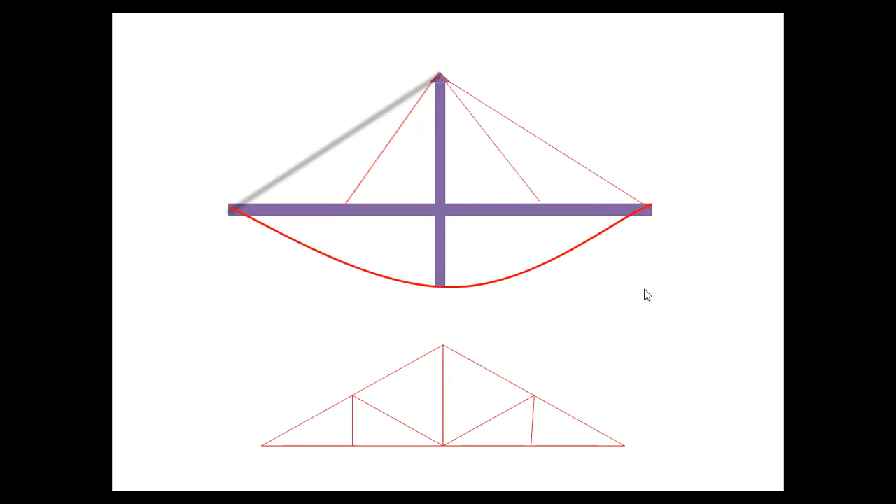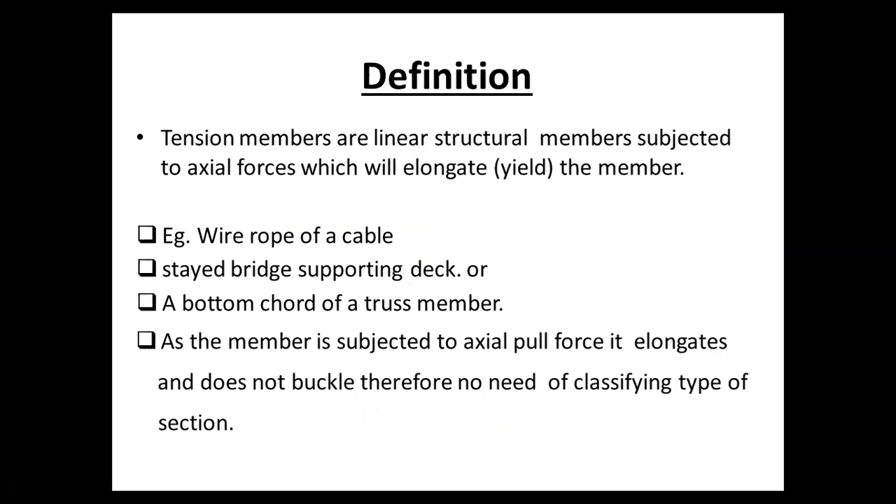So, types of cross sections for tension members. A tension member may consist of a single rolled section or a combination of sections as a built-up section, right? So, what is this built-up section? We can understand further by this. I am explaining you the figure, right? So, usually single angle and double angle sections with gusset plates are commonly used for truss members.

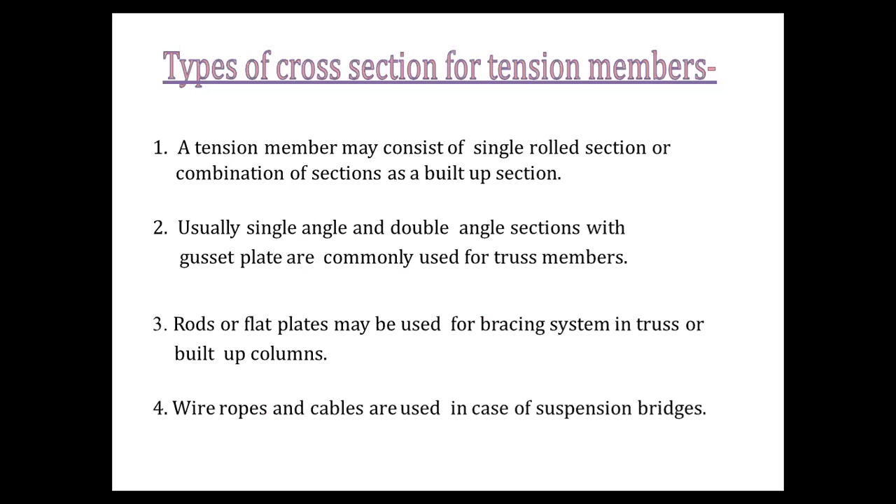Second is a W section. Next one is a square tubing. Our fourth one is a channel section. Fifth one, E, is a single angle. Then next is a double angle, right? It is connected by a back-to-back connection as shown, right? Next is a T section, right?

Next, this one is a two channel box section. There is one channel and two channel sections are provided. That's why we call it a two channel box section. Here next is the four angle box section. Here the box is already there and at the corner of the box there are single angles provided on each side. Hence, it is called a four angle box section, right?

Next is W with cover plates, right? And very next is the four plate box section. In the box sections, at the end of the box, the plates are provided. Hence, this is called the four plate box section, right? So these are all the sections which we use as a tension member, right?

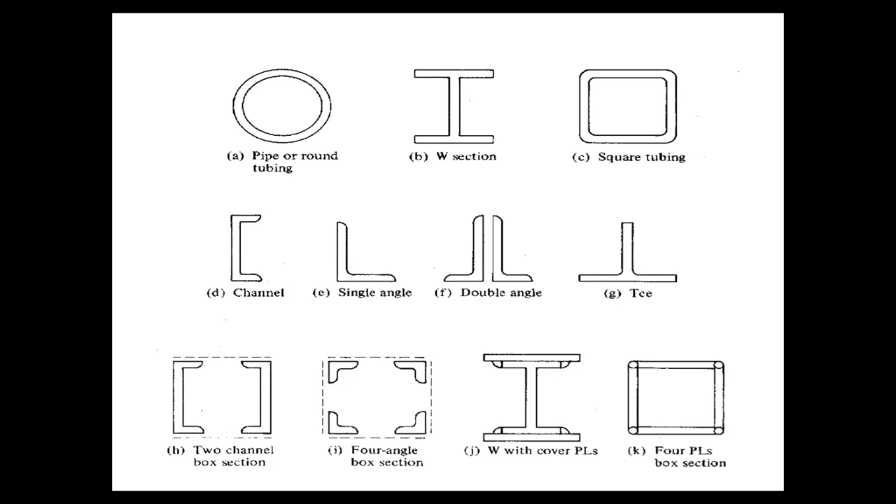So next is the limiting slenderness ratio for tension members, which is given in your IS 800 2007, table number 3, page number 20. Right? This table indicates the maximum value of effective slenderness ratio. Right? So here different members are given, and for the respective members the maximum effective slenderness ratio, which is known as KL by R, also differs, right?

Suppose we first take a member carrying compressive loads resulting from dead loads and imposed loads. In an example, if the condition given is that a member is carrying compressive load resulting from dead loads and imposed loads, then we take this slenderness ratio KL by R equal to 180, right? Very next is a tension member. First one is for compressive loads from dead loads and live load.

Second member is a tension member, right? So generally here in this chapter we will learn about these tension members and this example. So we take this second case, which is a tension member in which reversal of direct stress occurs due to loads other than wind and seismic forces, which will be given its value slenderness ratio KL by r is equal to 180. Now the third one is for compression forces resulting from combination of wind and earthquake actions, right?

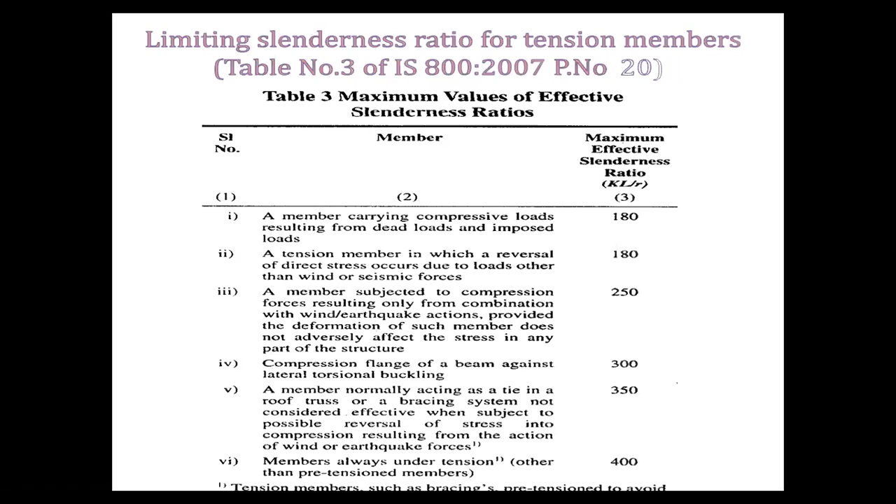So there are several members given, and also given their respective maximum effective slenderness ratio, right? So I can explain what value is taken while calculating the example, right? Next is mode of failure. So there are three types of failure. First one is gross section yielding. Next one is net section yielding, and the last one is block shear failure. I think the last one, block shear failure, I explained earlier while we learned about the welded section or bolted connection. I think in bolted connection I explained it earlier, right?

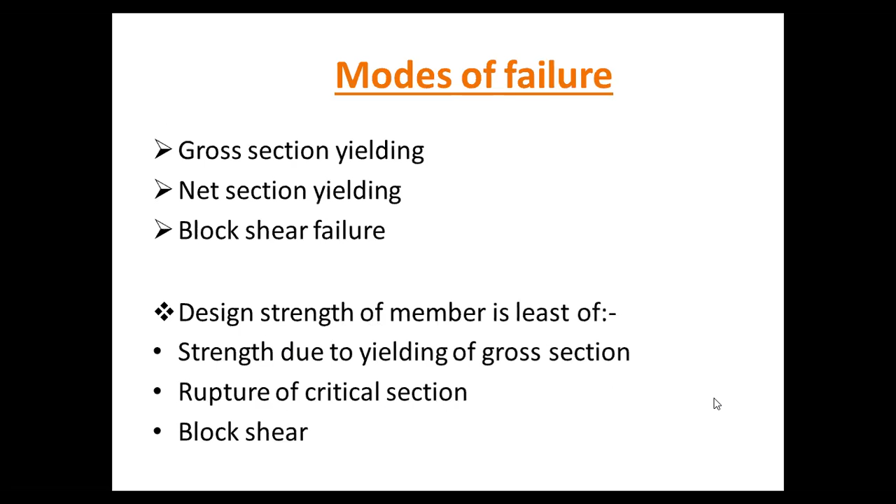So next is design strength of member. When we find the design strength of this tension member, it is the least of these three values, first value, second value, third value, right? So in the comparison of these three criteria, whichever formula or answer is minimum, we take as design strength of member, the least of these three values, right? The first one is strength due to yielding of gross section, second one is rupture of critical section, and the last one is block shear. If the rupture of critical section value is less than the other two values, then we take the design strength of member as rupture of critical section, right? This is for example, right?

So next, design of tension members as per IS 800 2007 section 6. So design strength, which is known as Td, which means tension design, of the members should be greater than the factored tensile load Tu acting on it. While we design this tension member, this criteria is the most important for our example. If the design strength is not greater than the factored tensile load, then the section designed by us is not recommendable, right? Because if the design strength of member is not greater than this factored tensile load, hence the member fails at certain limits, right?

So design strength of a tension member is the least of these three values, right? It is given in the table, given in the code, right? So the first one is design strength due to yielding of gross section, which is known as Tdg. T means tension, d means design, and g means gross cross section. Next one is design strength due to rupture of critical section, which is known as Tdn. And the third one is design strength due to block shear, which is known as Tdb.

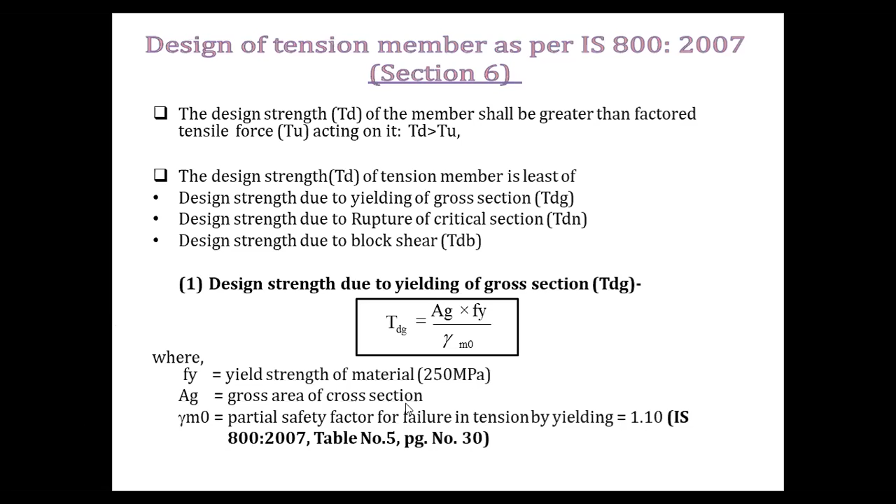Second criteria is design strength due to rupture of critical section, which is known as the TDN. Here there are two cases considered. First case is while we design this for plates and threaded rods, and second one is single angles, right. So this is given in IS 800 2007, clause number 6.3.1, page number 32, right.

So the equation for the design strength of rupture of critical section for plates and threaded rods is TDN equal to 0.9 multiplied by An fu divided by gamma m1, where fu is also known as ultimate tensile strength of material, right. Means here in the example you are given a plate, so you can take the ultimate tensile strength of this plate, which is also given in your example. Next is An, which is the net area of cross section after deduction for bolt holes, right.

Here two types of bolting systems are provided. First one is chain bolting, and second one is stagger or zigzag bolting. Now what is this chain bolting and stagger or zigzag bolting? This we will learn in the examples, right. For now you continue with this equation, which is An is equal to b minus n multiplied by dh multiplied by t. Here b means width of plate, n is numbers, dh means diameter of bolt hole, multiplied by its thickness, right.

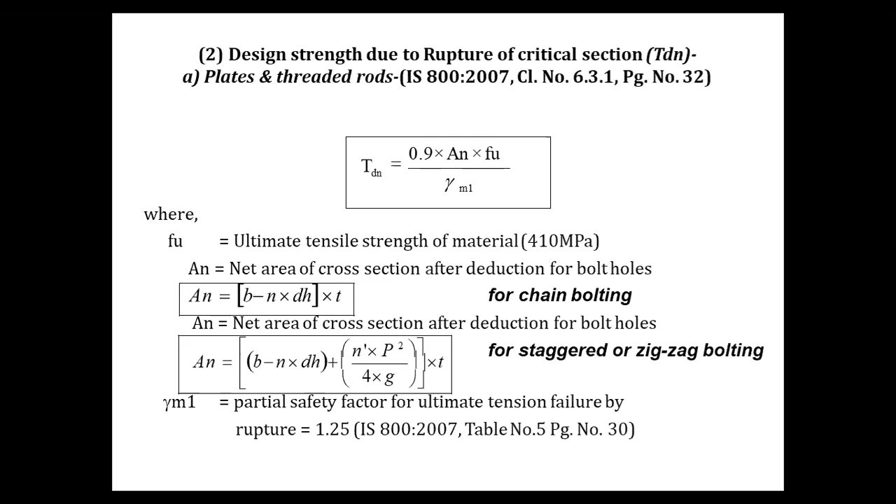Next, An is given for stagger or zigzag bolting, which is b minus n dh plus n dash p square by 4g, multiplied by t. Here gamma m1 is the partial safety factor, considered as 1.25, as I said earlier, right. Next is a single angle, which is given on page number 33, clause number 6.3.3.

The equation for single angle is TDN is equal to 0.9 Anc multiplied by fu divided by gamma m1 plus beta Ago multiplied by fy divided by gamma m0, where Anc is the net area of connected leg. Now the connected leg is the leg which is connected to the gusset plate, right? If our angle section is connected to the gusset plate, Anc represents the net area of connected leg. Ago represents gross area of outstanding leg. Fy and fu are yield and ultimate stress respectively.

Here, to find out beta, there is one equation, right? Beta is equal to 1.4 minus 0.076 w by t, fy by fu, bs by Lc, which is less than or equal to fu multiplied by gamma m0 divided by fy multiplied by gamma m1.

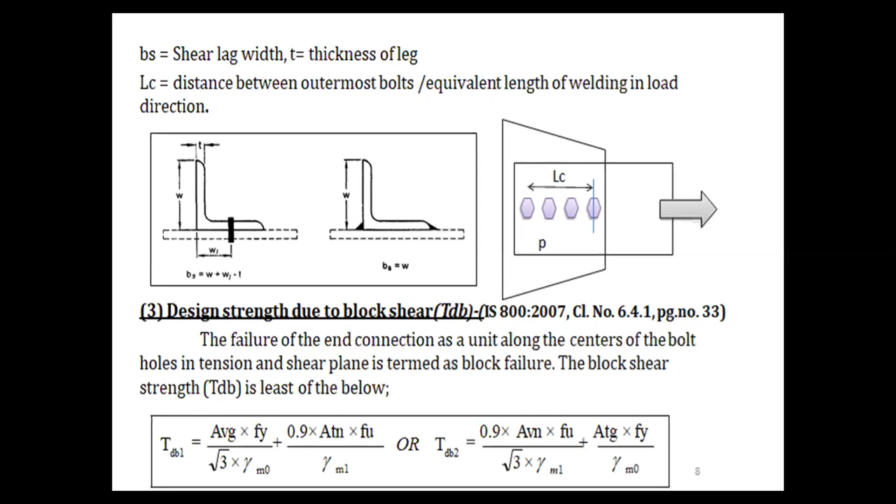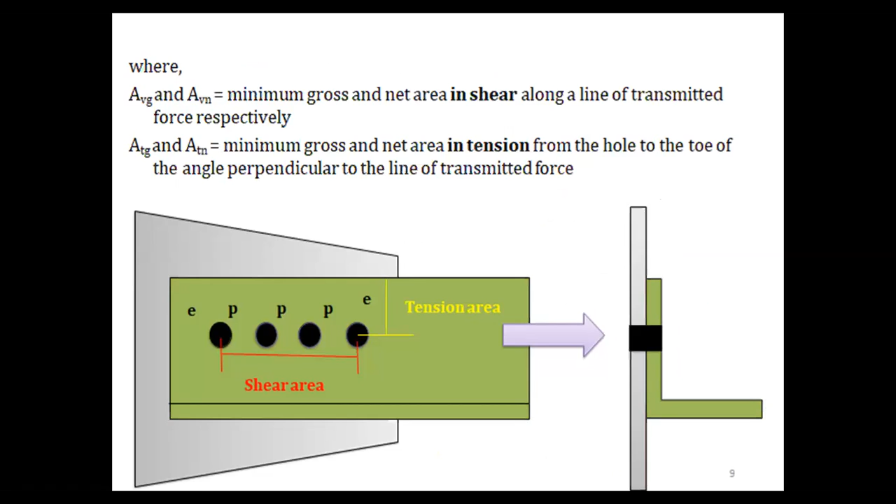The third criteria is design strength due to block shear, which is expressed as TDB. The failure of the end of the connection as a unit along the centers of the bolt holes in tension and shear planes is termed block shear. Now this equation we will use. Avg and Avn are the minimum gross and net area in shear along the line of transmitted force respectively, and Atg and Atn are the minimum gross and net area in tension from the hole to the toe of the angle, perpendicular to the line of transmitted force.

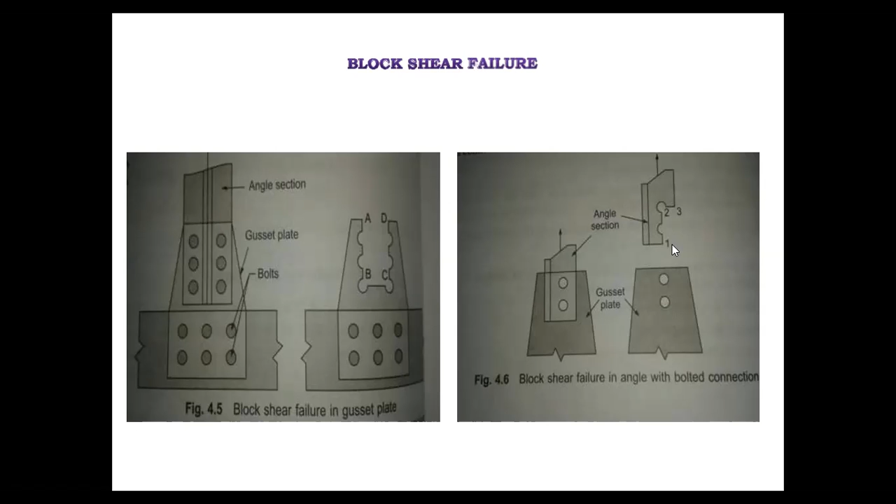Here, how block shear failure occurs is shown in block shear failure in gusset plate. Because of tension, these 6 bolts or the middle of the section are torn apart. So it looks like A, B, C, D, right? In the second one, block shear failure in angle with a bolted connection, when tension is applied, this section and gusset plate are torn apart, right? So it will fail like this, parts 1, 2 and 3. It breaks like this.

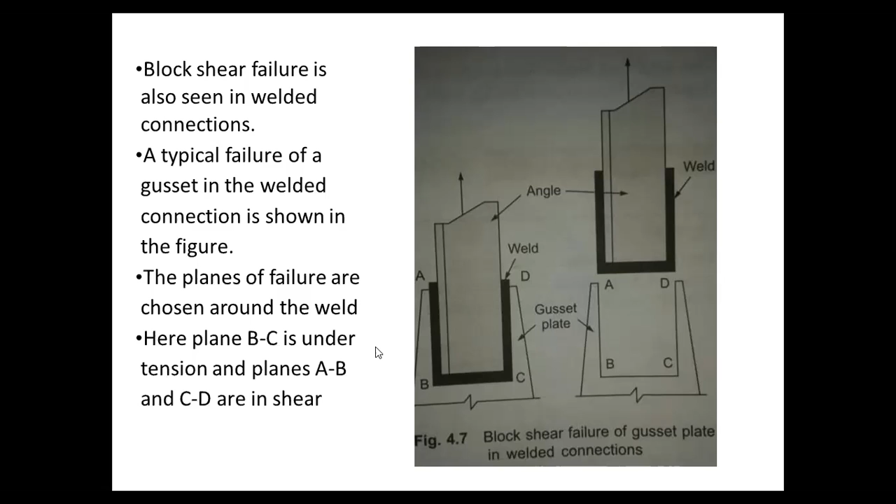Block shear failure also occurs in welded connections. A typical failure of a gusset in a welded connection is shown in this figure, right? Because welded connections are provided at the periphery of this gusset plate, when tension is applied, the gusset plate and angle sections are torn apart from each other. The planes of failure are chosen around the weld. Here the plane BC is under tension and AB and CD are in shear.

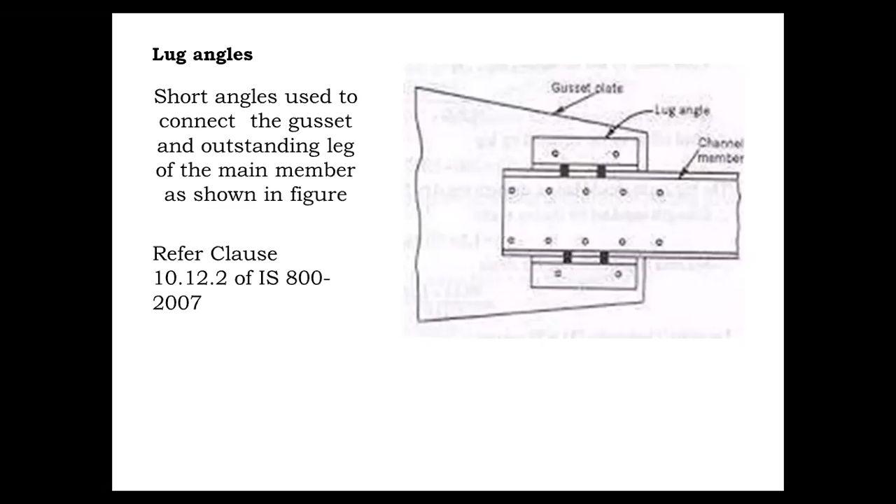In the very next lecture, we can understand this design by calculating some examples, right? If you have any doubt, you can contact me, right?